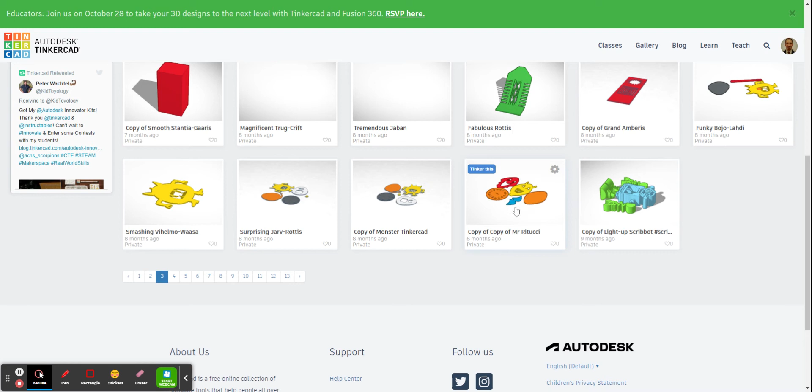And when you open it up, if we just go into it here, you would have gone through all the checks that you've been covered in the lesson about how to make sure that it is ready for laser cutting. So we'll just go through this again quickly.

Firstly, you're going to check that it is all level. So I can do that by just changing the front view, make sure I go to perspective and turn it off. I can see that everything's level. You can also see that it's also sat on the blue grid. That is really important - if there is anything floating, it will not laser cut it.

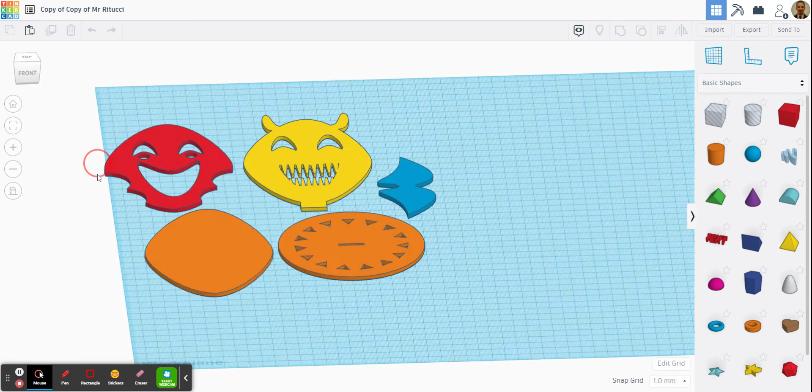Also, if I look from the top view - the views you need to use really are the top and front view - I'm also looking for any lines that are crossing over. So I can't see lines that are crossing. Everything is a continual line like this, which means that the laser cutter will cut it out. There are no lines that are crossing. That's really important as well.

And you also need to finally make sure that everything's close together. So everything's close together like this. Okay, and that's all good. So that will be ready to be laser cut.

So before you laser cut it, what you need to do is just take a step back and go back into the menu. Now, this is a really, really important step because if you forget it, you'll have a lot of work to do. So I can't stress enough how important this next step is.

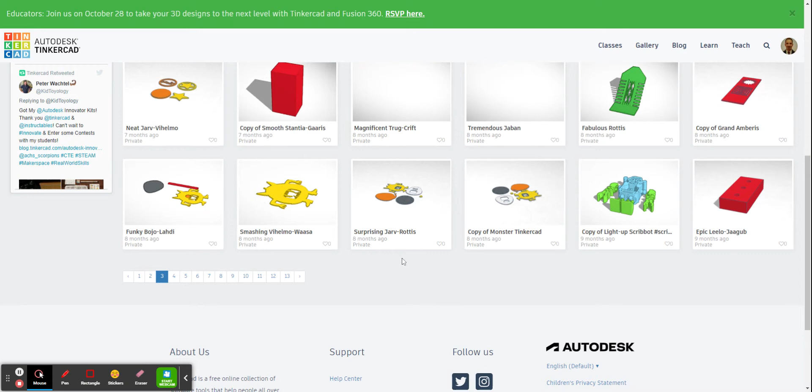So I just try and find the work which I had before. Is it on the first page? I wonder... oh, it's there.

Okay, so what you must do - it's really important you do this - before you create your assembly version. Now the assembly version is what it would look like in 3D. So I don't want you to create it in this document here. I want you to create another version of this.

So to do that, what you'll do is you'll click the settings, this little cog here, and you'll just go to duplicate. And what that will do is create two of the same file now. So if we just go back and have a look, we can see now that in our library, in our menu, that we have two of the same files.

And that is really important. So we have this file here and this file here. So with one of them, what we're going to do is we're going to go to settings, and we're going to go to properties, and we are going to just rename it. Okay, we're going to call this one laser cut.

Okay, so now that's what I'm going to laser cut, so I'm not going to touch that one. This one, I'm going to go to properties and call it 3D. Okay, and then save changes. This one I'll turn to 3D - this one I'll leave, I won't touch it, only for laser cutting.

So we're going to open this one, and now we're going to create it as a 3D model - so what it would look like in the real world once it's actually been laser cut. So I'm going to go into tinker this.

And this is going to be a good test of your skill to be able to get things correct and in the right place. There are a few ways you can do this, but I'm going to do it this way. So the first thing I do is I'm going to get all my pieces, 1, 2, and 3, and I need to rotate them all by 90 degrees.

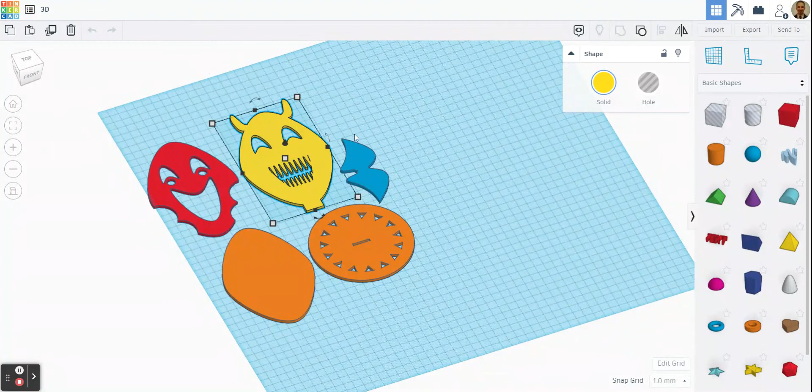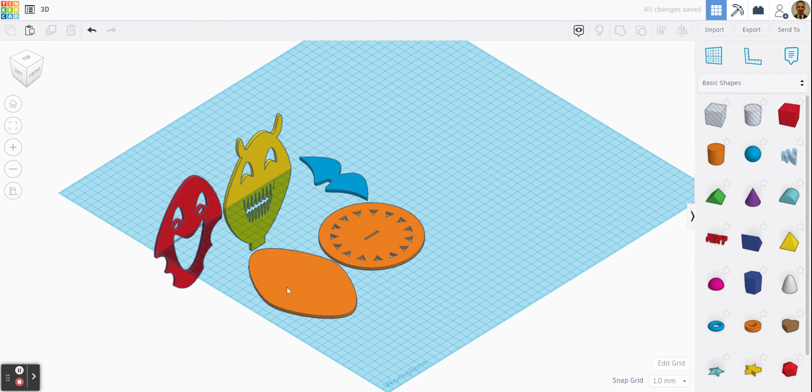So when you want to rotate them, if you turn around, you can see that this little arrow appears. And if I hold down the shift key and click this arrow, it limits the amount of degrees I can move, which makes it a bit easier. So I'll just turn that to 90, like that. I can then hold down shift, do the same thing again, turn it to 90. And then this one, hold down shift, and turn that to 90 as well.

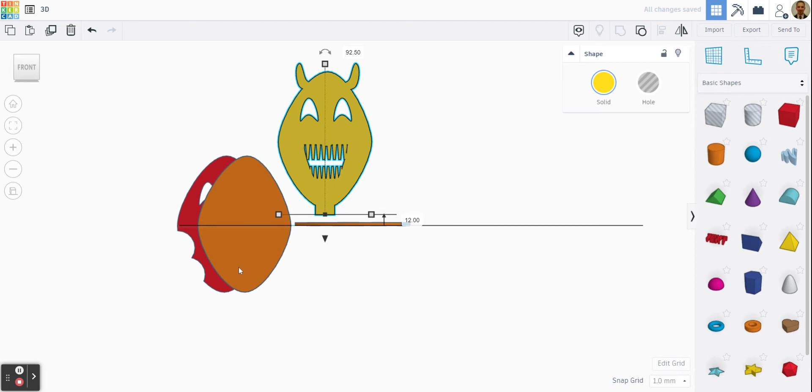All right, so these pieces, as we can see at the moment, they are all below the work plane. So what I'm going to do is just click them and use my arrow key here to move them up, like that. I'm going to try and get them all the same level, roughly. Okay, it's probably about there.

And then same this one as well. Now, what you'll find with this, you have to do a little bit of moving around and changing. So that's like that. What I'm going to do now is click this one and use my right arrow key to just move it into place.

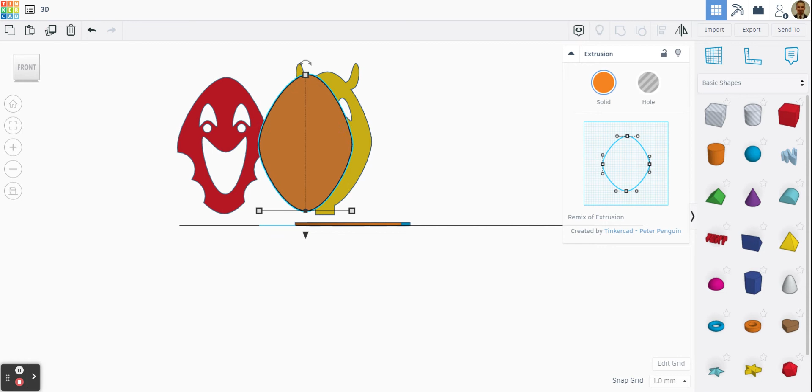So it needs to match up with that one. It's like I'm playing a computer game on my keyboard, playing left, right. I'm just going to tap up with the little cone here. Okay, and there we go, it's in line now, I can see.

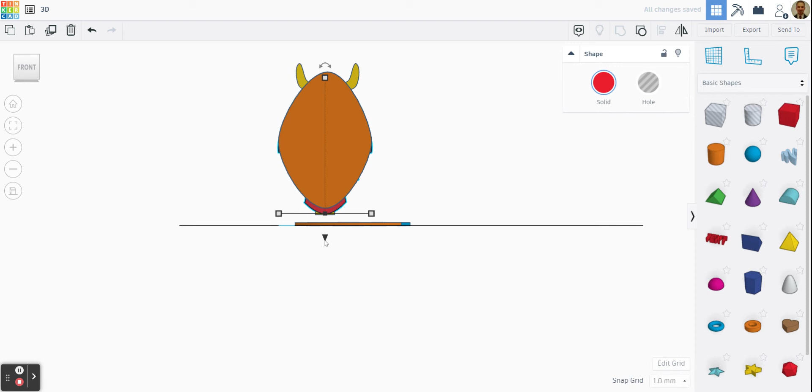I'm going to do the same thing again with this one, just hide it behind the rest of them. I'm not too worried about the order yet because I can change them in a second, I just want to get these roughly in the right place. So again, I can see that is in the right place.

If I change my views now, I can see that it's not quite right. So what I need to do now is work from a different view. I'm going to click left this time, get this one and press the left-hand arrow key. Okay, now that needs to be behind this one.

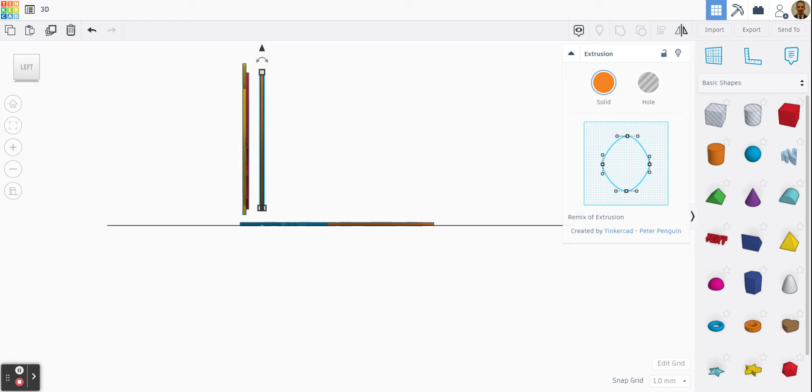We can always zoom in for a closer look. I wanted to actually touch that yellow one, so the orange touching the yellow, perfect.

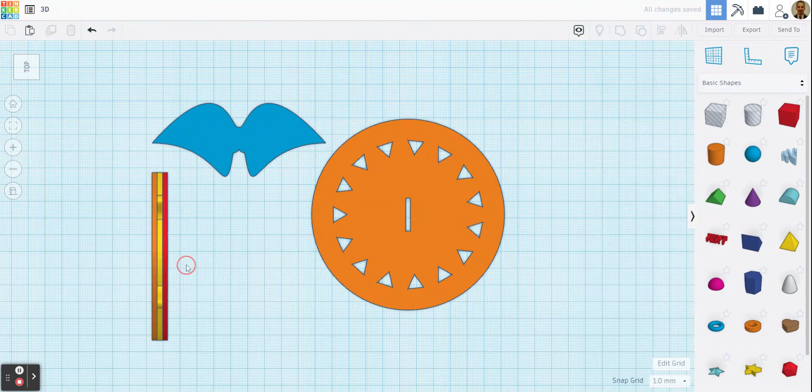Let's have another look now from a different view. Let's look at the top, so that looks like. I can probably see from the top there's a little gap there, so I can just tap it again and it disappears. Then I can see that these are all in line and it's in the right order as well. So that now is in the correct order.

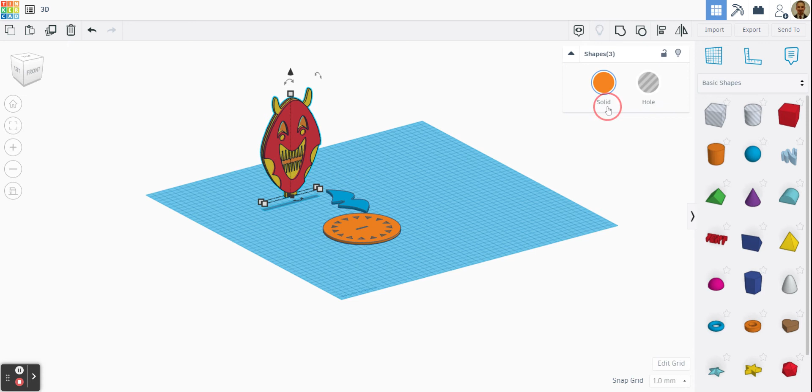So now it's in the correct order, I can group it. I'm going to highlight all that, and click this color box here. If I want all the colors to stay the same, I'm going to click multicolor. It's just changed back to normal, but multicolor will keep them all the same when I group them. If I click group now, okay, they're all grouped together, so it's now one object, but the colors have stayed the same, which is important for me as well.

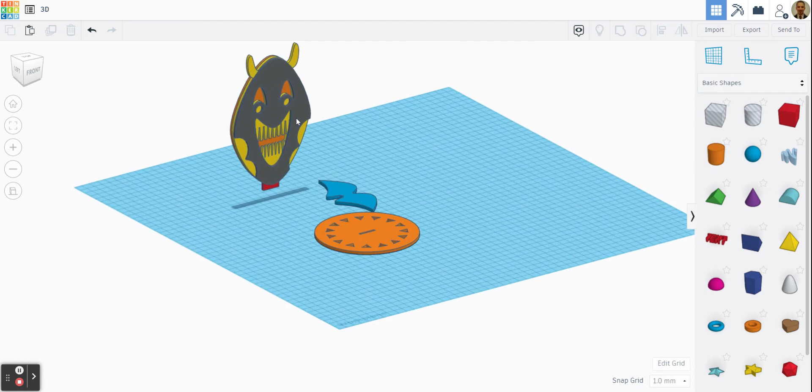So that's that part. Now I need to get this main part onto here. Again, best way to do it is just move your view, click the bit you've just grouped, and then move the down arrow. What it'll do is move it all together because you've grouped it.

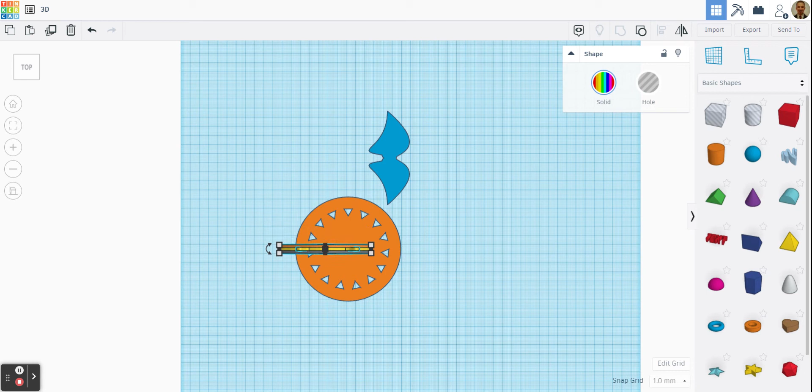And again with this one, it's just a case of getting it in the right place. What you can do, as we've shown you before, is highlight this, use the align tool, and align it through the center and that way. That should now put that directly above the slot that I created.

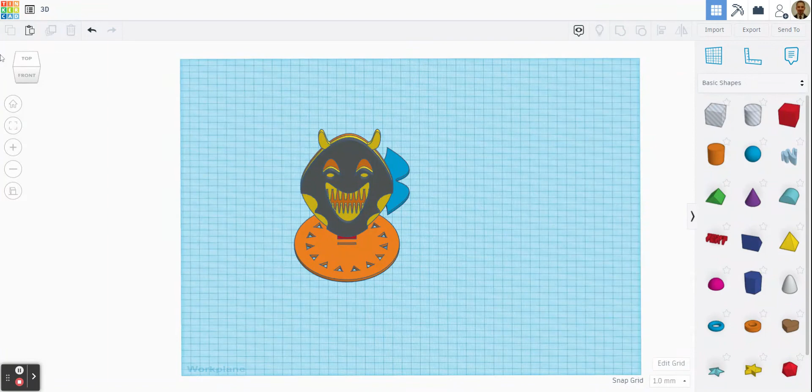So what I'm going to do now is literally get this and lower him down into the slot. So it just touches - no, that's too much. So like that'd be perfect. Okay, so now I can see that is sat into there where it needs to be.

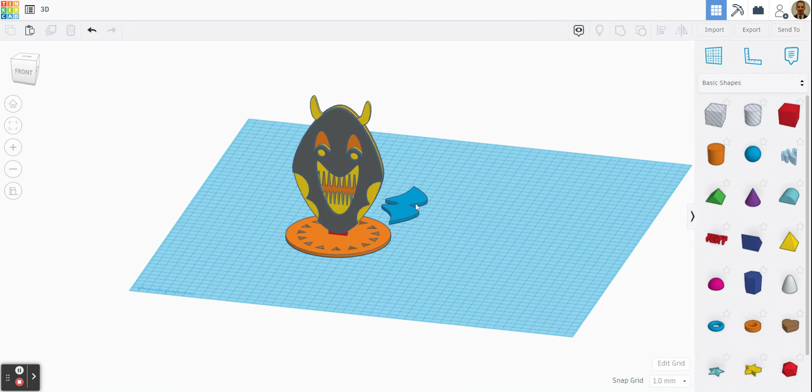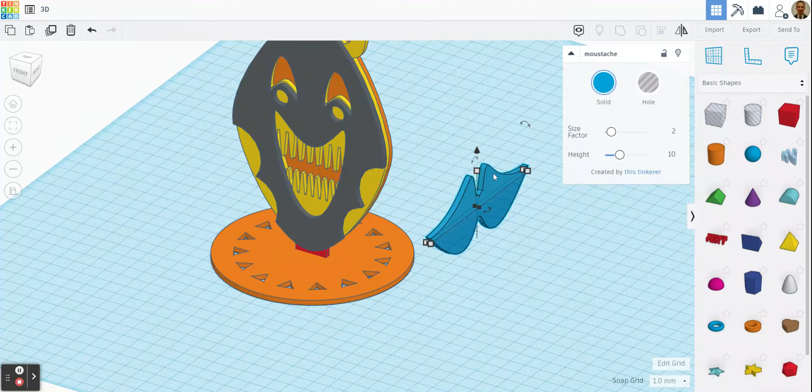And the last little bit is the mustache. It's a similar way to what we did before: we're going to rotate it in the right orientation. So hold down Shift, 90 degrees, and then I also need to spin it the other way. To do that, you can see there's an arrow this way that turns that way, an arrow that way that turns that way, and there's also an arrow here, so I need to turn that by 90 degrees.

Hold down Shift. So now the mustache is in the wrong place. I'm going to go to the top view and then move it into the right place using my down arrow key.

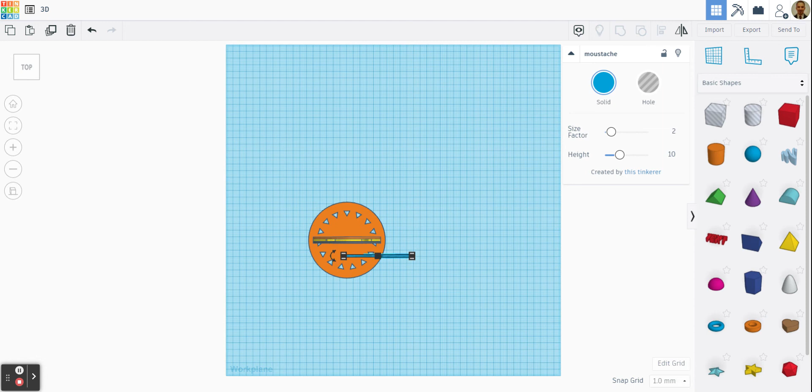Let's move it in front, let's sort of go left, and let's have a guess of where. Okay, we'll get it the same level. Let's just zoom into there so we can see. I want to get it level with the grey piece. It might not be in the right place, but this is the importance of using the views, because as soon as you change your view, you can see where you need to be.

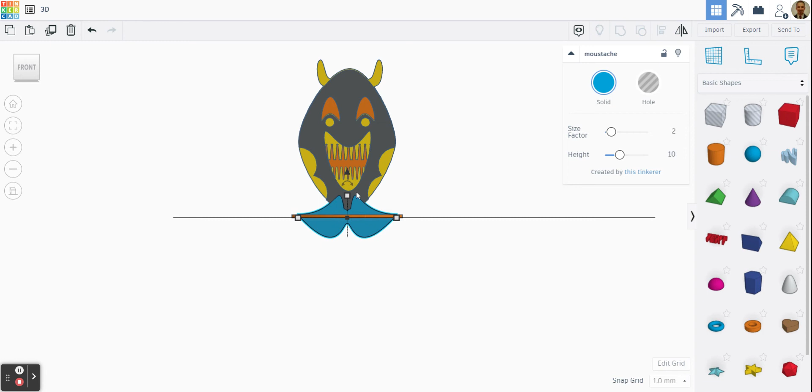For this exercise, you shouldn't really be using the 3D view. You should be just using the different top, front, side views and just taking your time and moving things around until they get in the right place. So that now is the mustache in the correct place. Okay, so I can see there it's in the correct place.

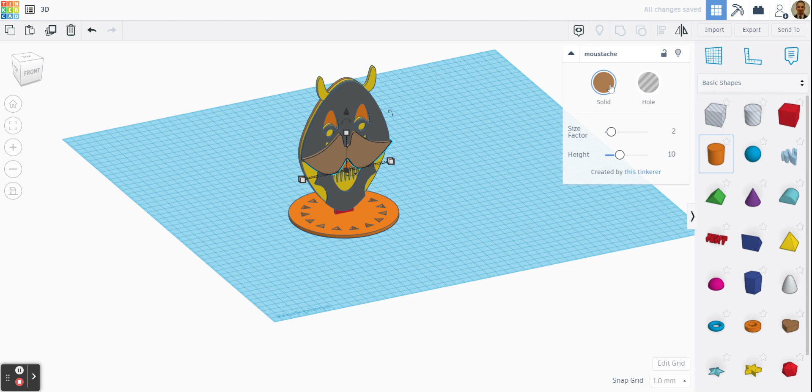Might just change that color. Let's give it like a - no, I don't like that. Not keen on that either. Let's give him a brown mustache. Okay, the mustache is quite big actually.

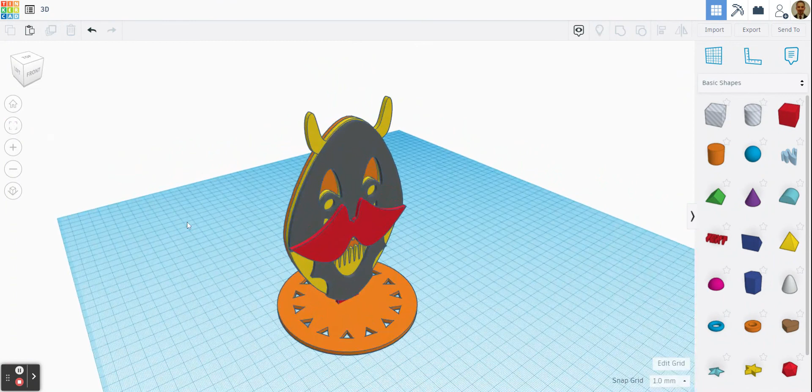But now that's your model all assembled. Now what you can do is turn the perspective on, and then you want to get into a good view. So this is a good view, it's zoomed in well, it's filling the screen. I've got my perspective turned on.

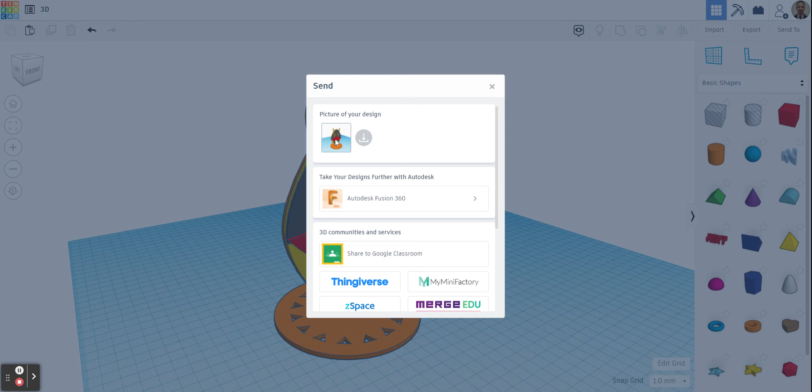Then what I want to do is take a screenshot of this so I can put it into my portfolio and show it as a 3D model that I've created. So to do that, it's dead easy. All we do is go up to here and go to send to, and then just click this little picture here, and that will download a 3D picture of your design, like so.

Okay, so what I've got now is if I go back to my library - okay, if it just hurries up - I can see now that I have, it hasn't updated, but I've got a 3D view and a laser cut view. So that's really important. What you don't want to do is turn it 3D and then realize, oh, I need to turn everything back flat to laser cut it, because that will take you a long time.

So please make sure you make a copy of your file.